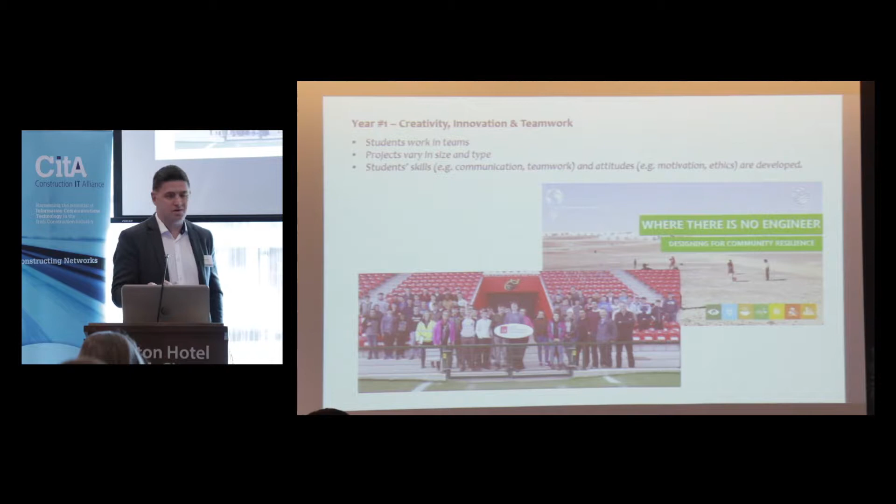This gets students to think of solutions to problems in third world countries. It's really good in that it gets them to think about ethics, it gets them to work in teams, it gets them to think about problems that they don't know. They're kind of going, 'we've just come to college, how do we know the answers?' And you'd be surprised at the solutions they come up with. But most important is that we want them to get used to working with each other.

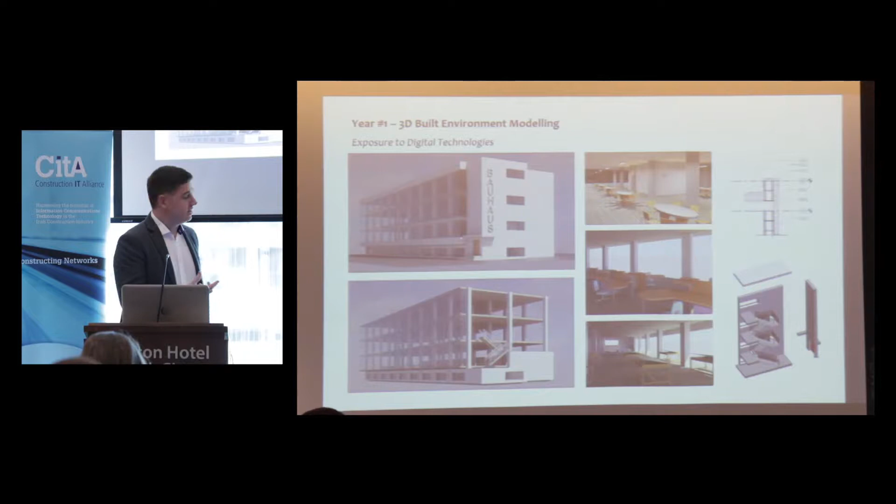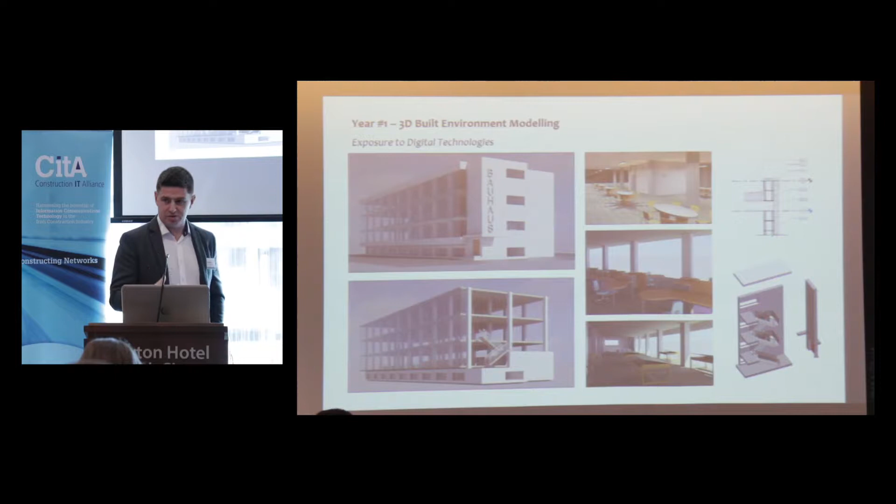Into some in first year, some in second year, we will look at the technology. You can say, look, BIM is about the information. It is, but if you truly want to get the most out of it, you need to be somewhat proficient in the technology, or at least understand what the technology can do for you. So we blatantly just do 3D modeling, okay, with no mad ideas other than it will feed in when they take it on later. What we do notice is that they can visualize what they're trying to do in the construction industry much better.

Another example is using an Autodesk project, InfraWorks, where we get them to work as part of a planning module, and they get to see an alternative to the Lee Tunnel. This represents where the tunnel runs in Cork, and if they put in a bridge instead, by seeing these things, they become more tangible for the students to understand. As an educator I have to keep in mind, I spent 12 years in practice on sites, dealing with problems and doing designs. These students are just getting used to all this terminology, and trying to visualize it on top of that makes it difficult. These pretty pictures, as they might be termed, are really good from an educational viewpoint.

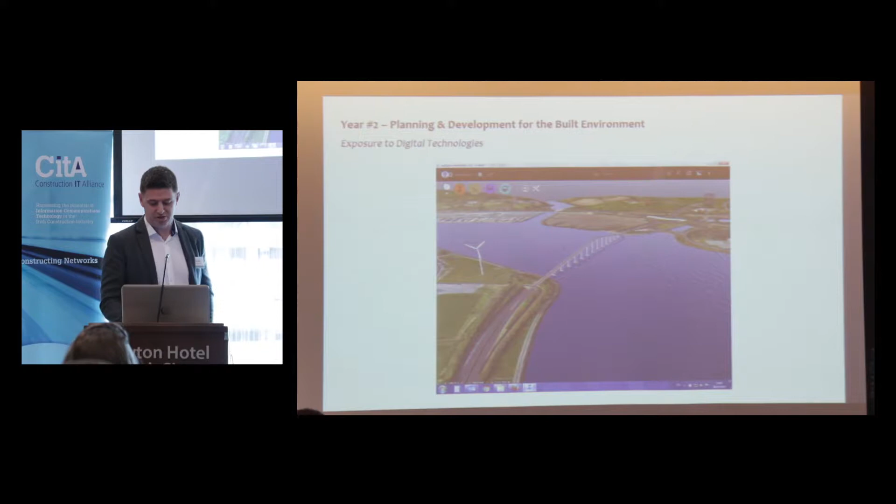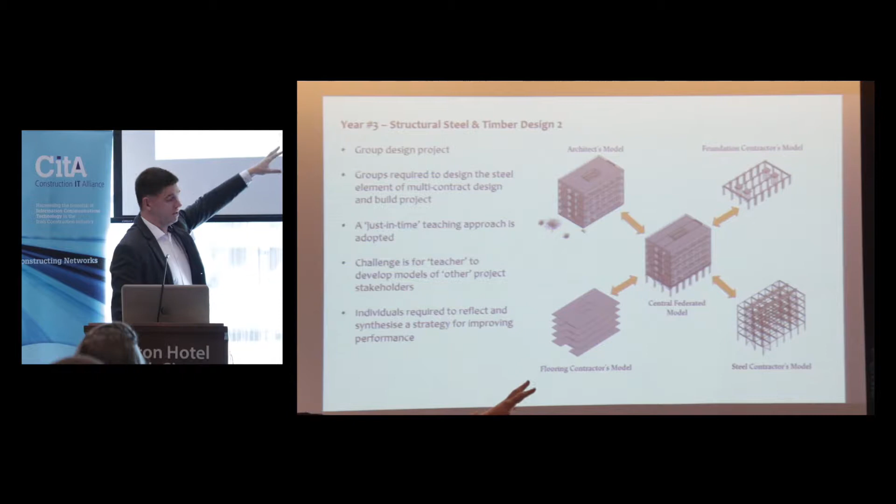So then we move on, as I said, in second year again we do some more technology. In third year we start to build up the three pillars - the process, the people and the technology. A module under my own control has students charged with working for a steel contractor to design a steel frame for a particular building, with particular inherent difficulties built in. They have to work in collaboration with a separate floor contractor, an architect, a foundation engineer - it's like a main contractor doing a design-and-build who has handed out the design package to three different teams, and they have to work within that.

So they're starting to take these other models into account in what they're doing, which affects how they design - not just designing on a greenfield site with no constraints. They do this in groups, setting themselves up as a company subcontracted into this main contractor who wants to develop this building. An interesting thing we do at the end is they write a reflection on the process.

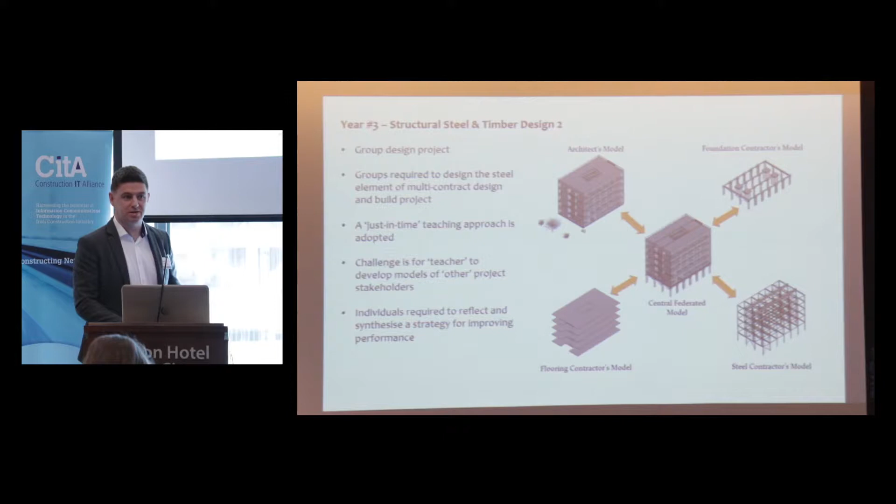So they're almost like company leaders. They're going, okay, we got through this process. If we were to do this again, how will we get better? They think of it in terms of people, process, and technology. They look at all of them and say what worked for us, what didn't. That helps from an educational viewpoint, that they can learn from their mistakes. If everybody gets everything right, I think people don't tend to learn a lot. But when you start making mistakes, as they inevitably will when challenged like this, it happens.

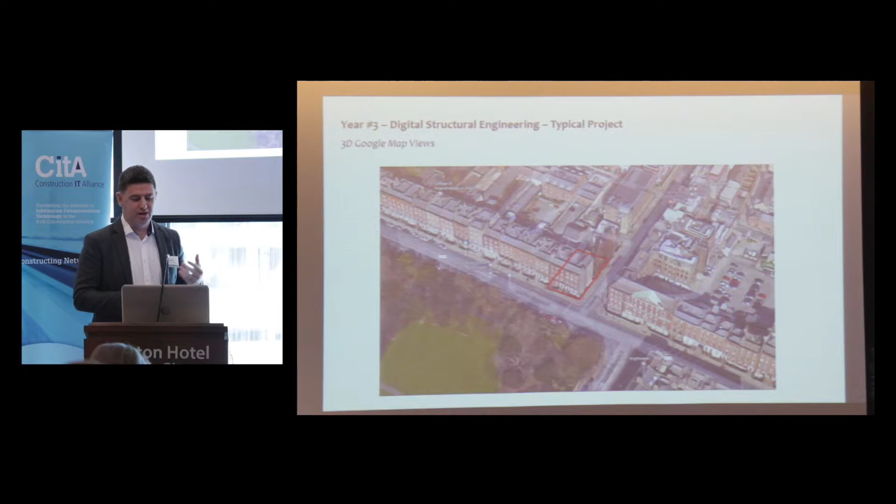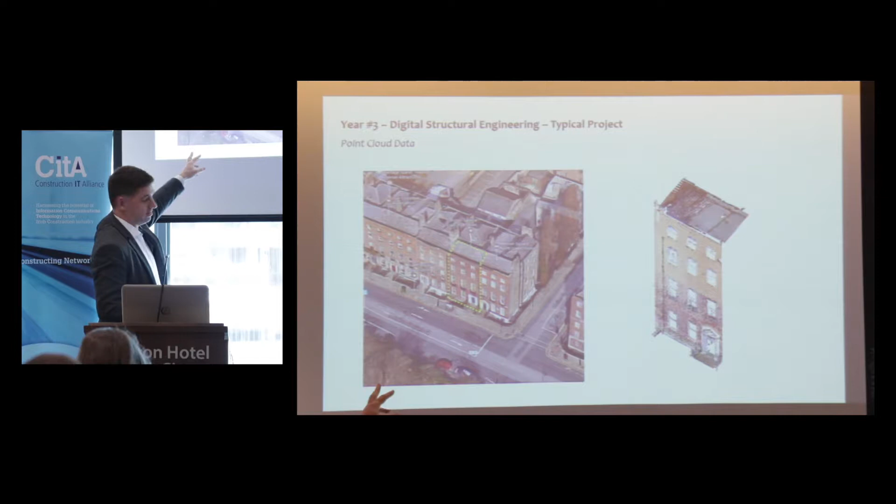Another example is in third year, an elective module I've tried to work into the course, since there's so much in the individual courses already: digital structural engineering. Fundamental to this, let's say we take two Georgian terrace houses, and we're retaining the facade of one. So we have a laser scan of that. By the way, that laser scan isn't of that particular building, in case you think it is - they're different. They just look alike enough to create that sense of reality for the students.

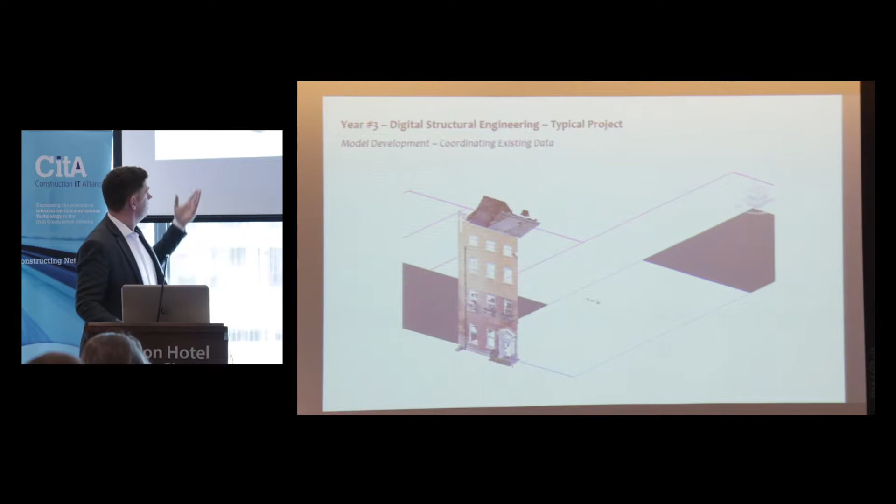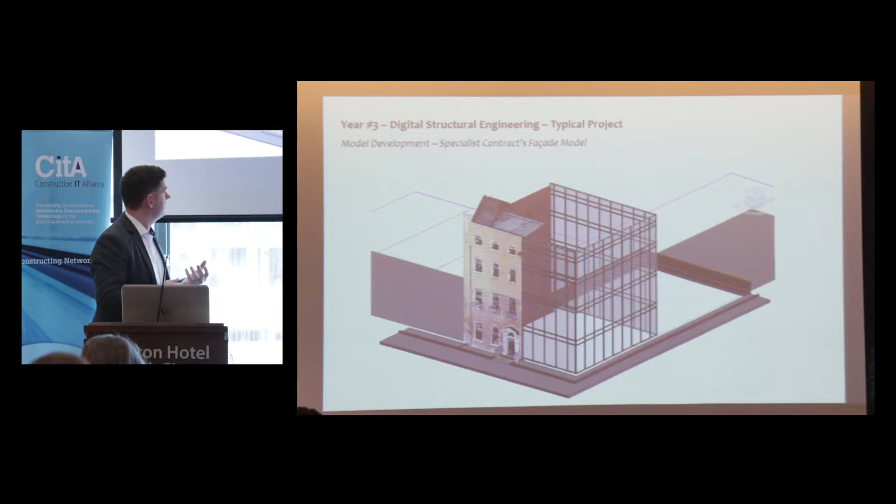The students take the point cloud data, build an as-is model of it, then receive a third-party facade model for the curtain walling, and within that context they have to build up the proposed new structure. When we strip everything away, we ask, where's the foundation? For structural engineers, that's kind of important. So it helps me go, okay, is anything missing from that picture? And if they don't get it, I can explain it somewhat.

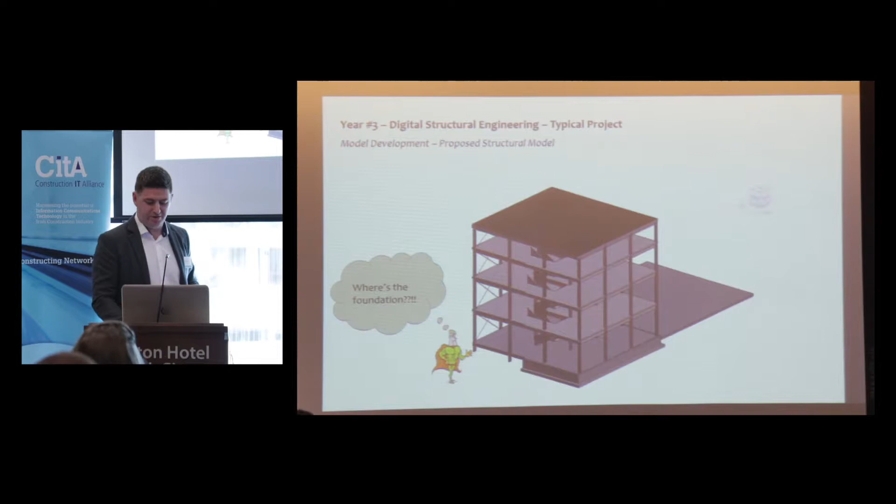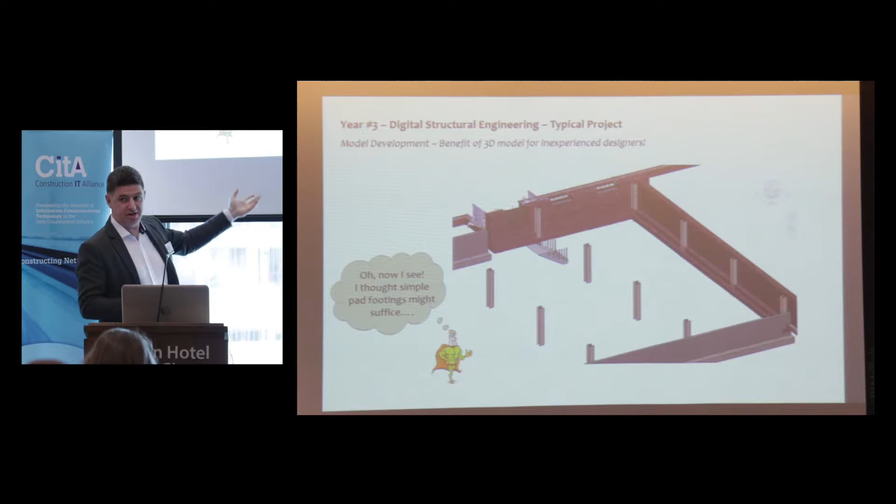The other thing it brings up is that pad footings would be the norm. If you look at that picture, perfect, a couple of pad footings there, great job. Yet if you look again in the context of the existing structure, you can see that the stepped-out foundations of the old Georgian house create a particular problem for where your column comes down. If you're a structural engineer with 5-10 years experience, you deal with this sort of thing day in, day out. But if you're a student who's never come across it, you can't tell me that visual doesn't help them understand the problems they face as engineers designing stuff. And the same would go across all the disciplines.

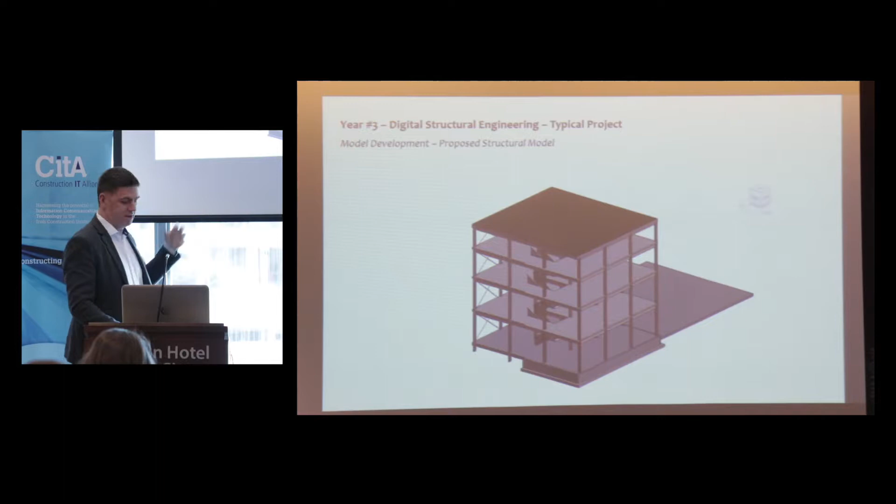Then we move into using that visualization, and look at using that central information model for other purposes. We can take that across into Tekla and do some structural analysis as we see fit. On that, I'd say - and this is the beauty of it - there's a lot of work to do on interoperability, on how pieces of software communicate with each other. The funny thing is when the students did this and it went across almost immediately, they went 'oh, this is great - what were you doing with us all this time, Ted, with that boring stuff? This is just spit it out.'

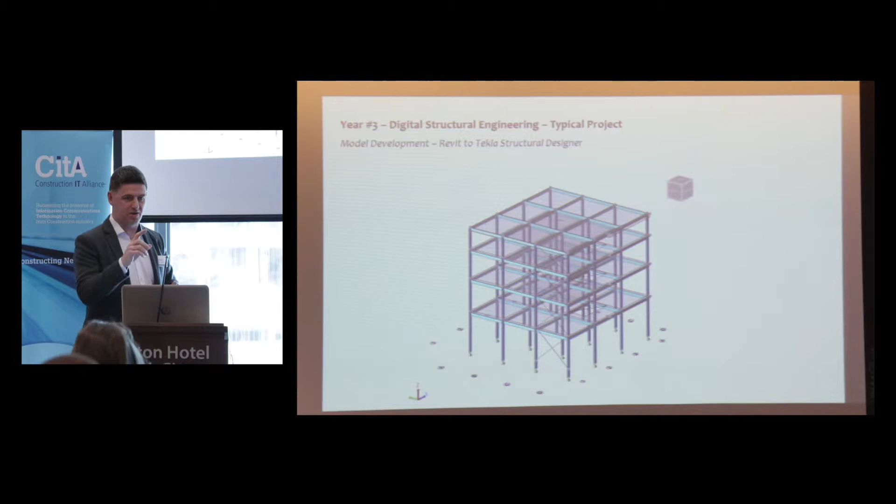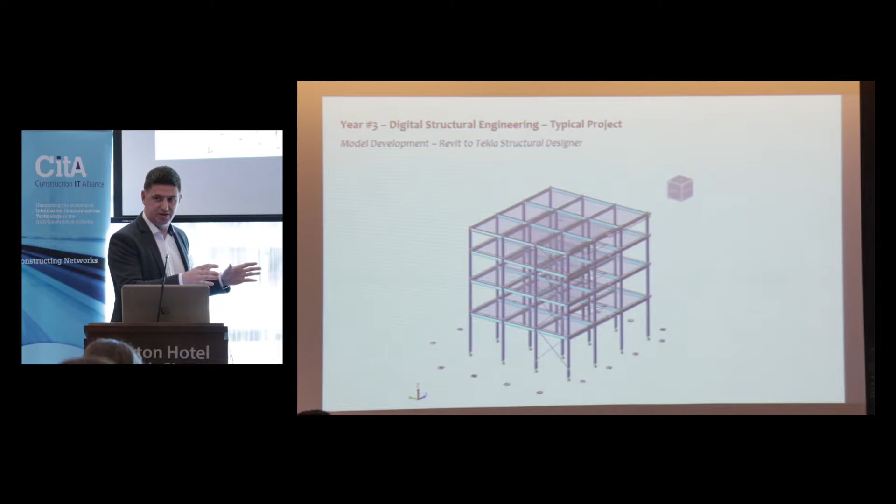And then we started hitting the analysis and errors - that any engineer, architect, or QS who's ever tried to extract information knows: it's great when you see it in the brochure, but when you're trying to do it in reality, there are lots of issues. So you spend a lot of time gaining experience finding out what the errors are, and that all takes time. That's fine if you're a consultant with someone in charge who allows you to learn, because you get proficiencies and efficiencies from that in the long term. But I'm in a classroom with 18 students getting 18 different errors - it's not exactly inclining me to push the benefits of BIM.

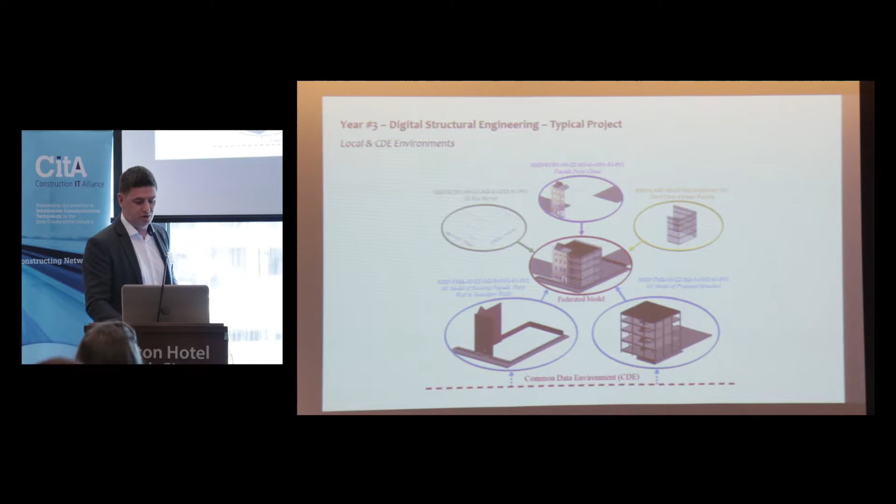This is the context, the bigger picture of what they work on - this is the common data environment. In it, I would have made available to them the map, the point cloud, and the architect's model. So they would sit there, and you can see roughly, if you have really good eyesight, that we're using the naming convention from PAS 1192. These are the two models that they've pushed up, which allows me as a lecturer to go in and look at how the thing ties together, what they've designed. Down at a local level, they have their own company server and their own models.

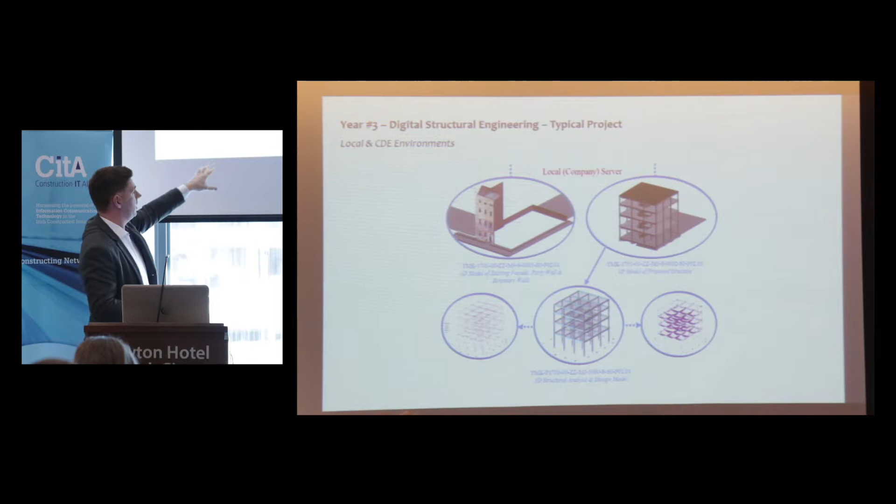Again, we're using a company naming structure that's somewhat compliant with PAS 1192, but does reflect what people are telling me in terms of reality. And you can take that model down and create submodels, so again they're getting this picture of how the BIM thing works. The beauty is my module is called Steel and Timber Design, so they're still very much designing steel and timber as part of the process.

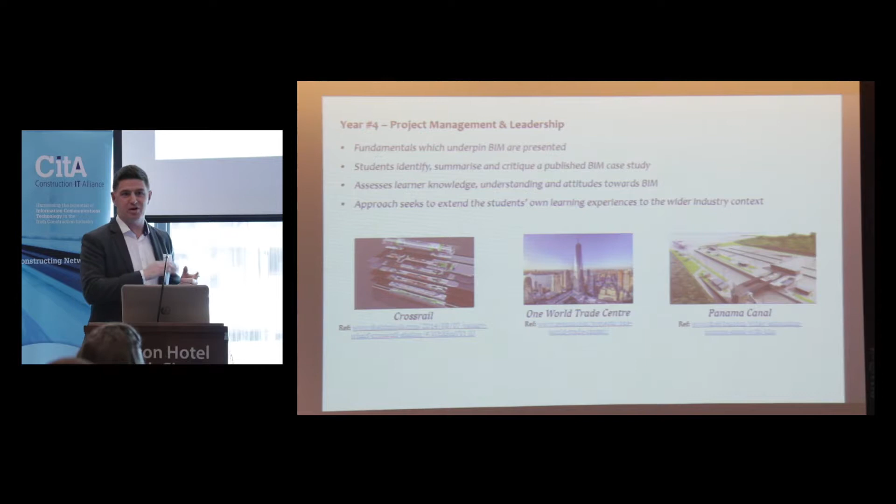Then we go on to fourth year, and this is old-fashioned - I lecture, they try and listen, some fall asleep, some stay awake. But a couple of hours I give them - the great thing now, when I started doing this, they'd never heard of BIM before, whereas now they've done those modules, so they have an idea of what I'm on about.

So I show them all the other stuff, and I say, right now let's have a proper sit down and list the standards and why they exist. Then I get them to go off and do a case study. The great thing for me here is I keep putting up the list of case studies we do every year, so they can't use any of the previous ones. I'm building up a whole repertoire of interesting case studies.

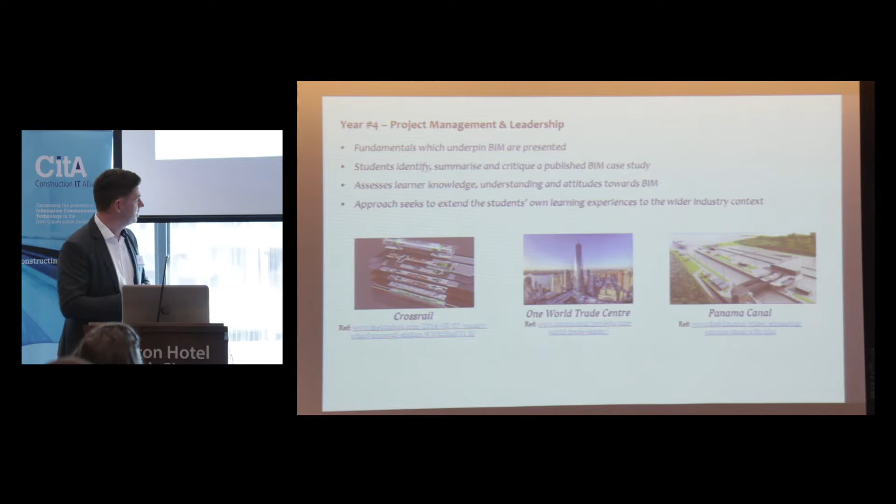The thing I've started to do with them now is get them to reflect back. Okay, you've got the case study - what do you think of it? You've done BIM. So I have the naysayers who think it's a load of rubbish, and then I have the guys who are really into it, who think it's the best thing since sliced bread, and the truth is probably somewhere in between.

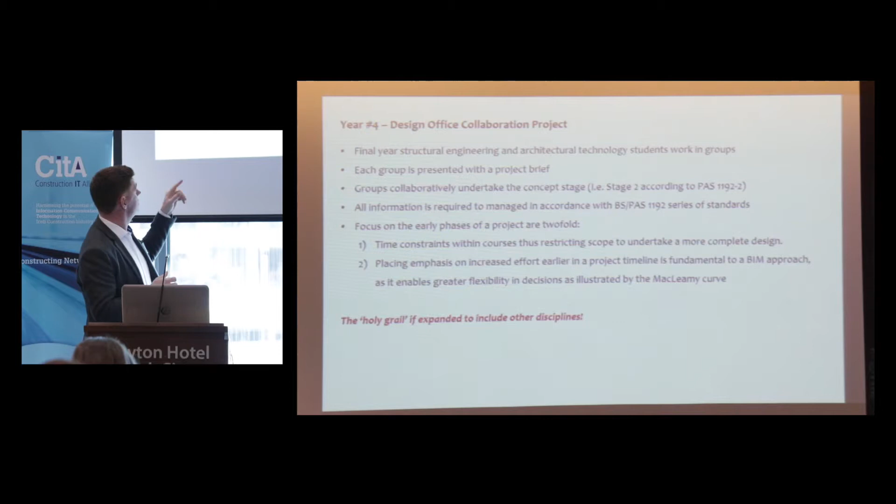But they go along and can tie the work inside in college to the greater scheme of things outside. And finally, probably the holy grail of what we're trying to do is the start towards interdisciplinary work. So in fourth year, I have a project that I run with structural engineering and architectural technology students, and I get about 15 to 20% of a module, because that's all anybody will give me to get architects and engineers to talk to each other. I'm sure Alan will say the same - this is not an unusual thing, I know in other institutions it's the same.

But what we do is we give them a little brief project. They have to explore the project for the early stages. And again, putting it in the early stages is because I only have a finite amount of time to work with them - we look at time constraints, that's restricted. But point two, we place emphasis on early effort, which links back to the MacLeamy curve of putting in that work earlier.

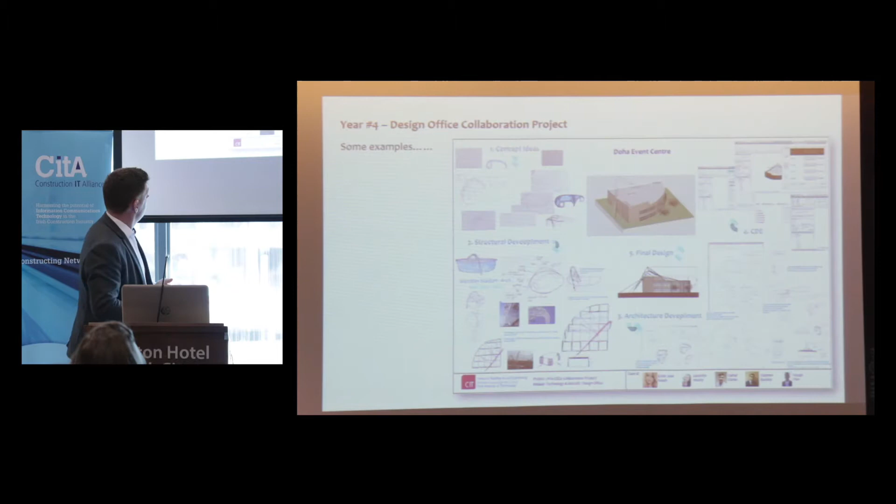So what do they produce? They produce a poster at the end which gets them thinking of all the different things. They have some hand sketches, which I think is absolutely fundamental, and they're tying those hand sketches into the BIM models. They're sharing this information in a common data environment. So we have architecture students in the architecture facility, and engineering students over in the engineering part of the building, and they can digitally collaborate on the project.

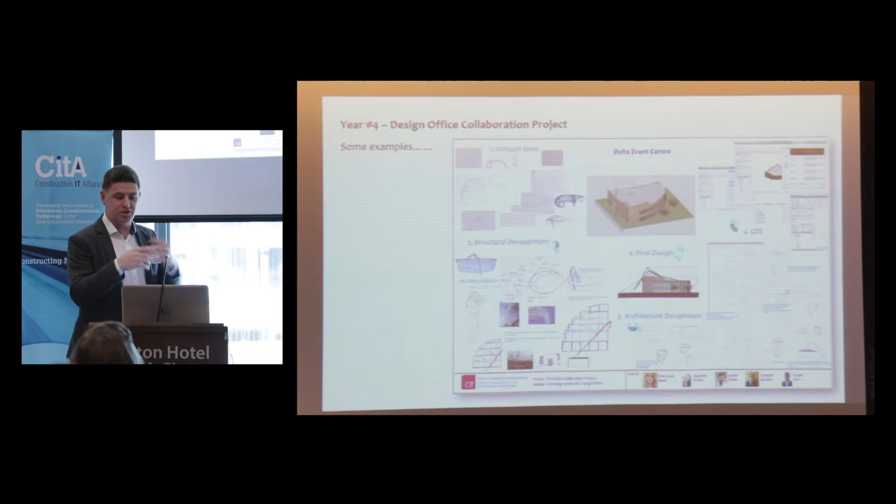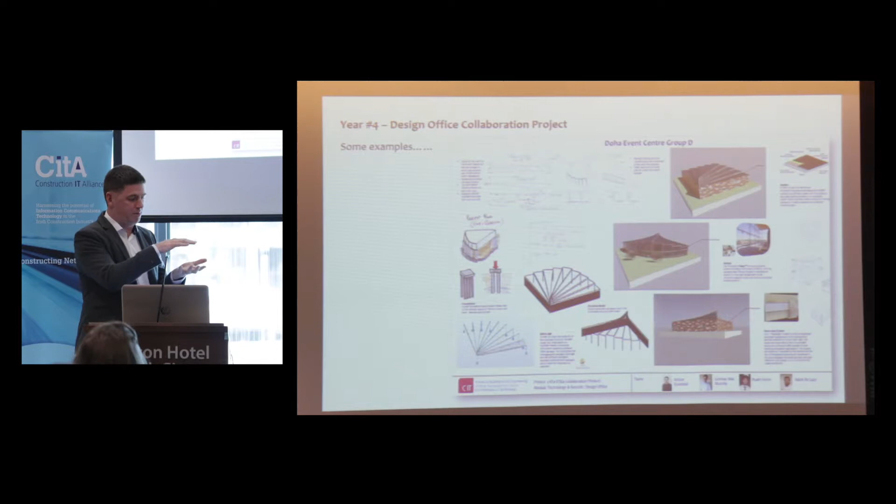So that's one example. Second example - I set them in the same building. This was an event center in Doha, and I gave them a raw BIM model of the shape, and they had to come along and actually develop that through the conceptual design stage. Pretty good - it gets them working together again, and works all the important aspects of it.

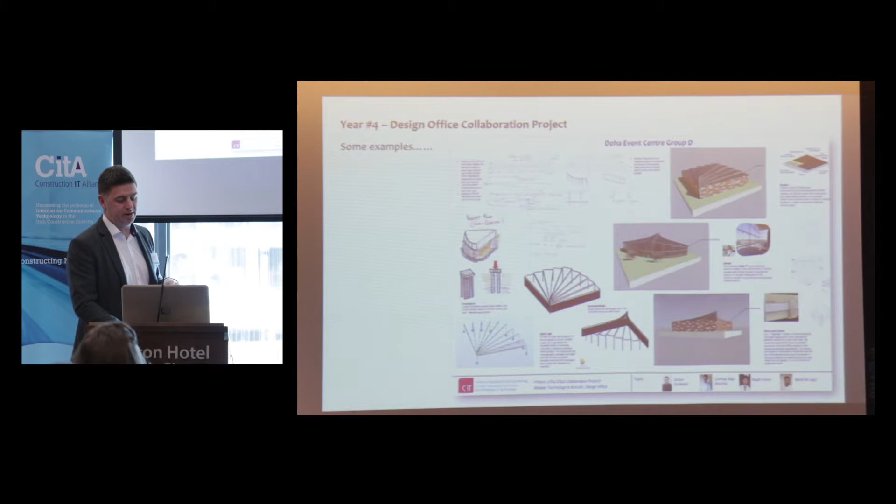So that's undergraduate - that's what we're trying to do. Hopefully it's making a difference, and hopefully we've not compromised any of the things that Engineers Ireland want in terms of output. So if we look at the research then - an interesting research project that kind of half accidentally happened a couple of years ago and has continued to roll.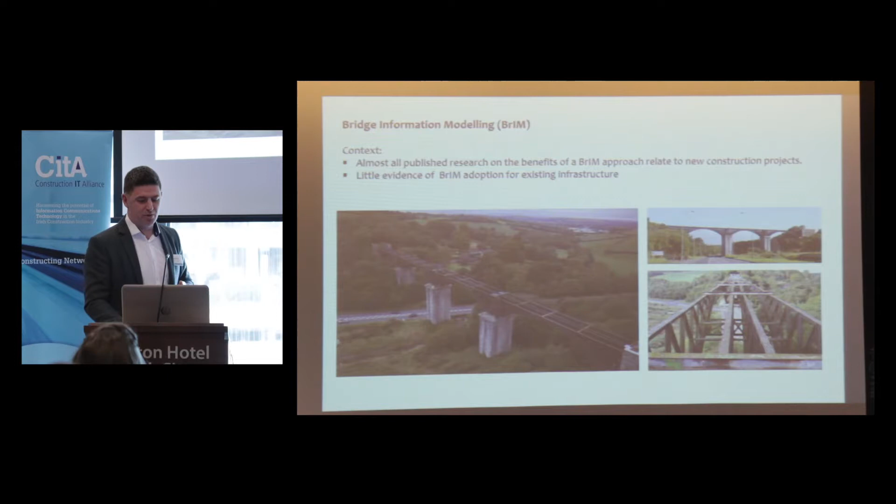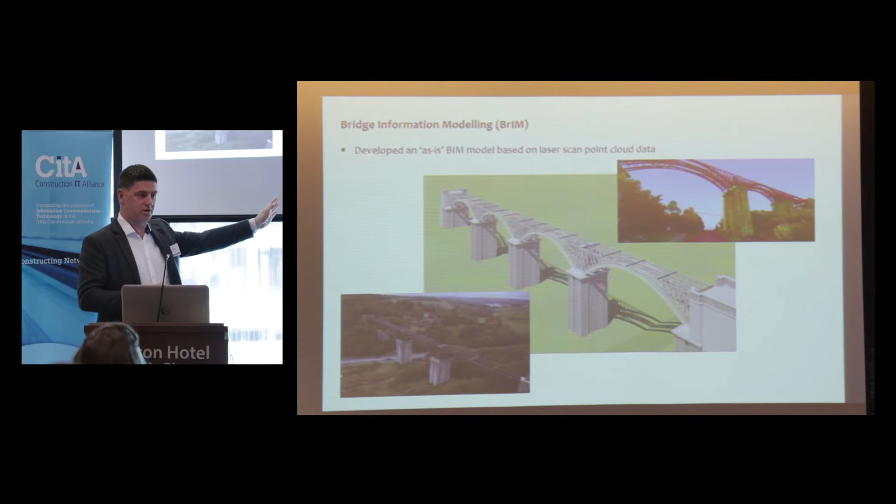Any of you from Cork will know the Chetwynd Viaduct. What we did with that is we had a laser scan done by Murphy Surveys - we didn't have it done actually, sorry, it was the client, as part of looking at the potential of a cycleway route from Cork to Kinsale.

So they did a laser scan survey, and I saw this at a different conference. It goes, hang on, you have a laser scan point data cloud - it could be a BIM story. So what we did is we worked quite hard and we developed a Revit model of the thing.

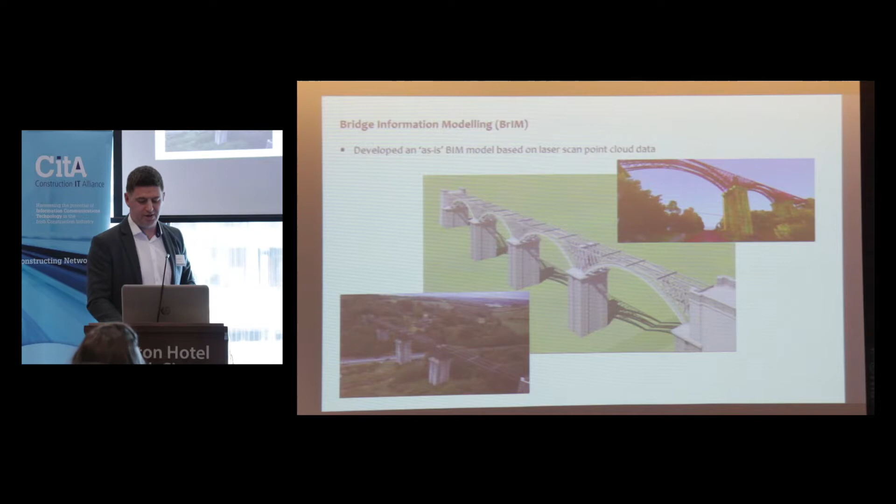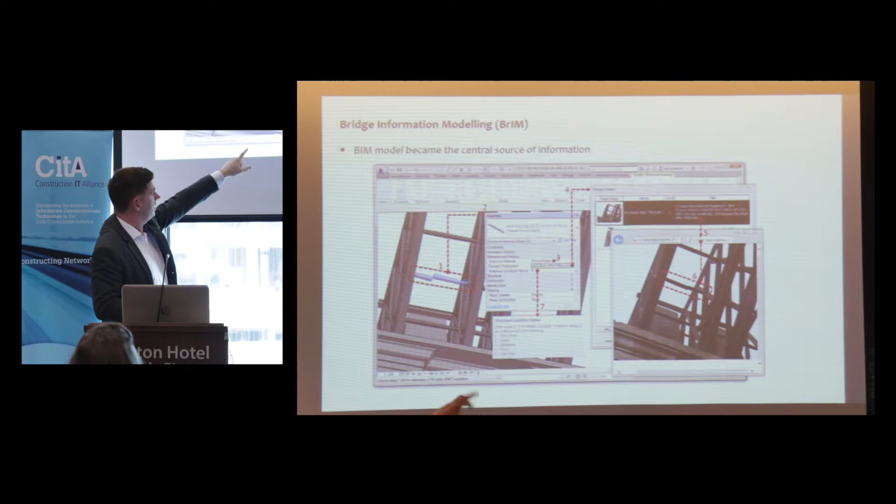We proved that through that we ended up with a lot of benefits. A little snapshot of the benefits is here, looking inside Revit. Here is the 3D model, and here's a particular fractured element of a tie rod. At point 1 you have the tie rod. I can select that, the properties will pop. Within the properties box, number 3 will tell me the type of material, and at number 4, there's a photograph linked in, so you can see the photograph of the real Chetwynd Viaduct and the model.

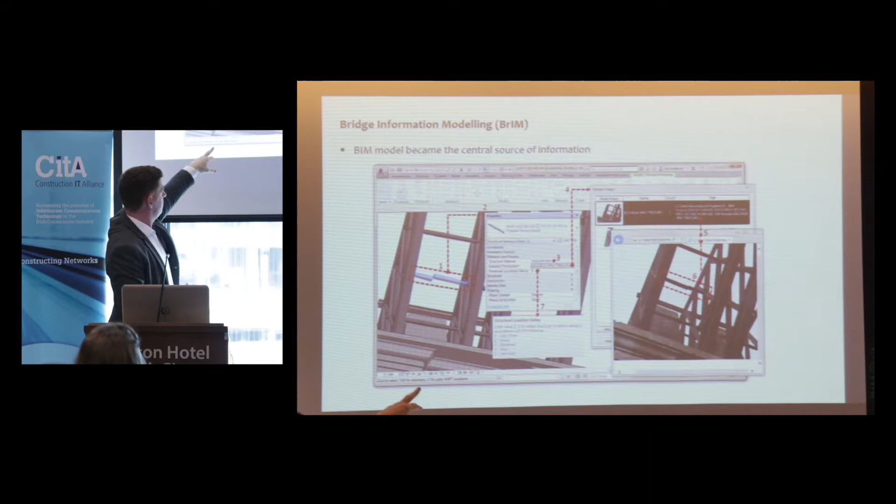As a senior engineer, you don't need to go out yourself, you might have someone more junior go out on site and do all this, then come back and say, here are the key points. That engineer can now get a sense of what's really the problem out there and where it exists in terms of the entire project. Finally, you can register what type of condition it's in. From an asset management perspective, this would be typical in bridge maintenance contracts, where you'd be scoring it. You can create automatic schedules from that, so you can see how many issues or serious issues are contained within a particular bridge structure.

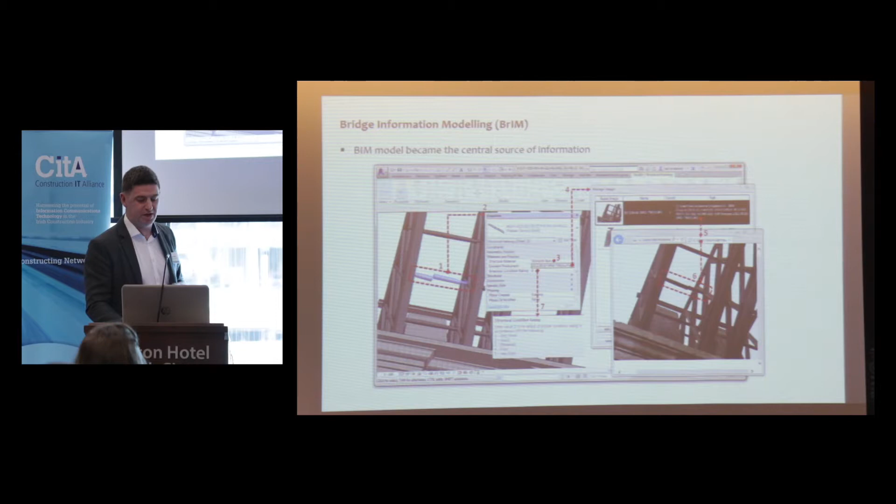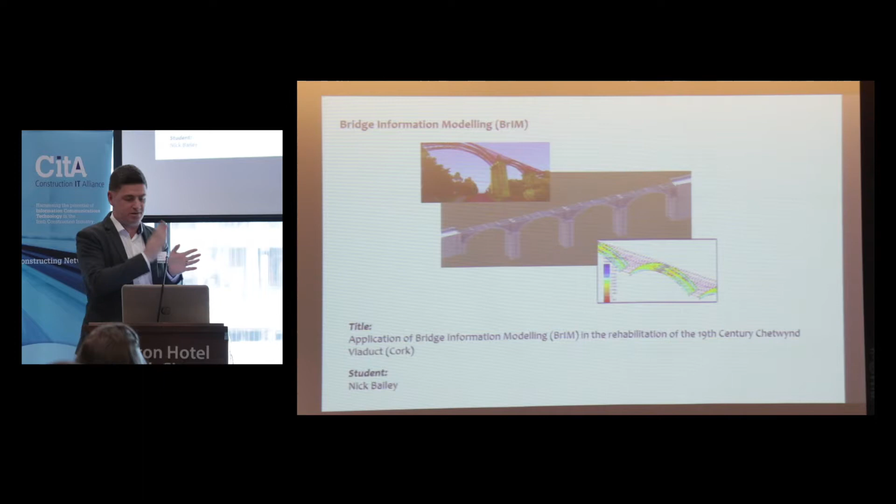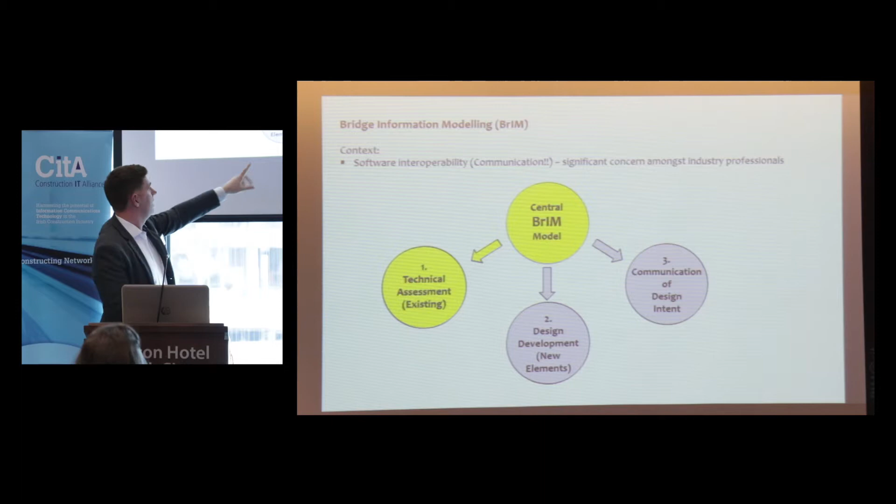So that was the first element. We moved that on, and a student in the last year and a half took it on as part of a research project, final year in our structural engineering degree, to see if there were further benefits. So I'd taken it up to an as-is model, and I thought, yes, there are benefits, let's see what happens after that. He looked at three different strands: the technical aspects of assessing the existing structure, design development with the new elements for the proposed cycleway, and finally how it operated in terms of communication.

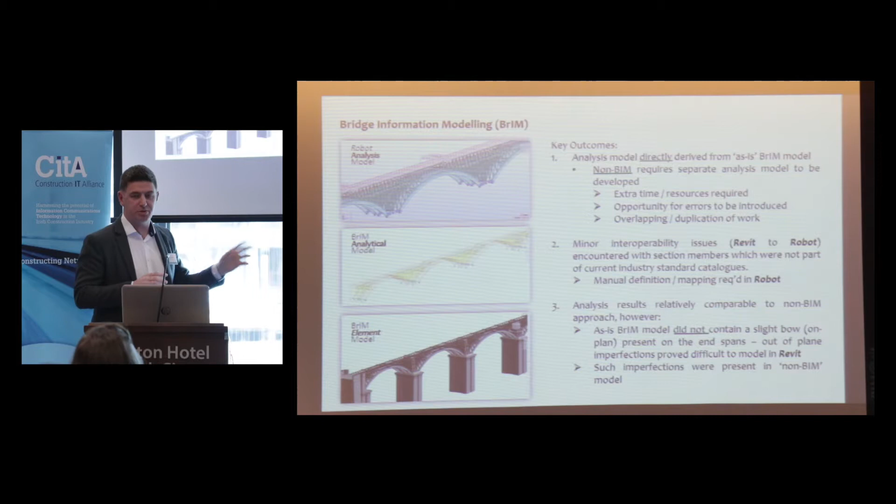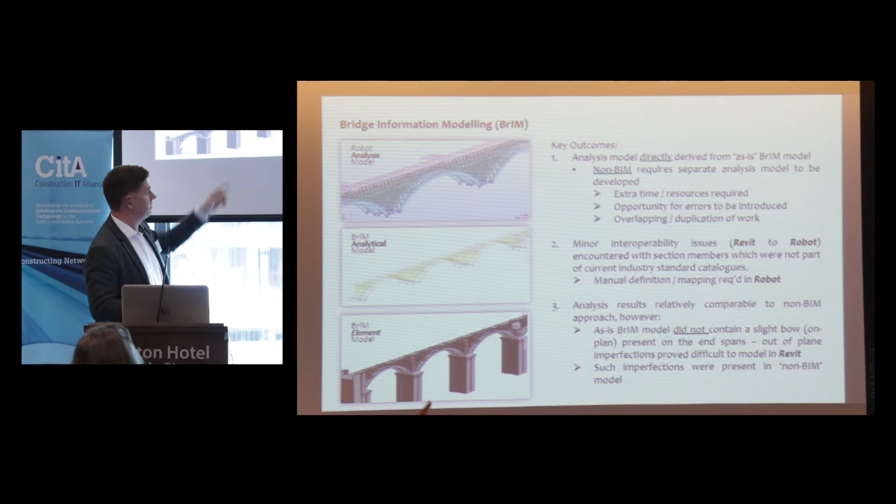Taking the first one, in terms of the model, he was able to take the Revit model I had developed, bring out the analytical model that sits behind it, into structural analysis software quite quickly and run the analysis. Now, that wasn't perfect, but here are some outcomes. In the non-BIM approach, you need separate analysis models versus your element model, which takes time. That was negated by the fact that I built one model now suited for two purposes. There were interoperability issues with material properties not being right, so they had to do a bit of work in the analysis software to feed it back into the model properly. Finally, the analysis results were comparable with the original assessment done via the traditional approach.

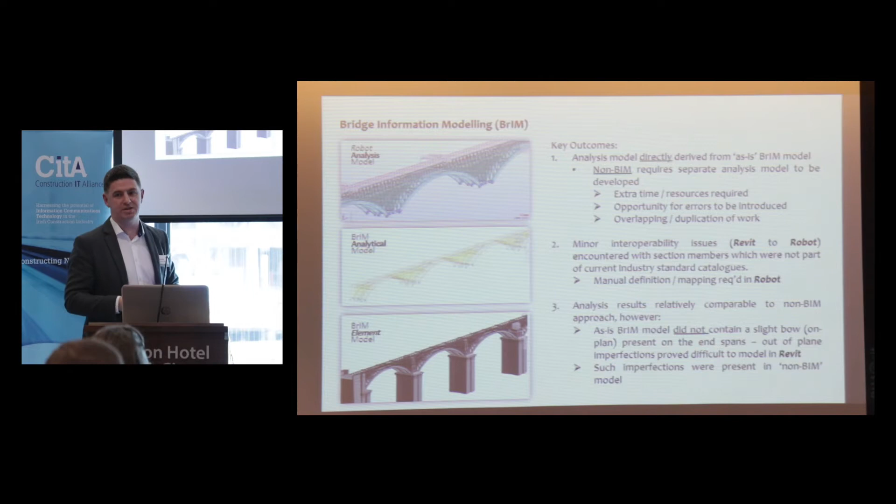The thing to point out, I found it really difficult. In the long run of the bridge, there's a slight bow in the spandrel wall, and if anything's bowing, it's more likely to buckle. Unfortunately, Revit - and if there's somebody in this room who can help me with this - I was able to adjust it in two directions, but that third direction, Revit really doesn't like being slightly out of plane. So again, I'm pointing out the beauties of technology, but hopefully giving you a dose of the realities that exist as well. There are limitations we need to get through.

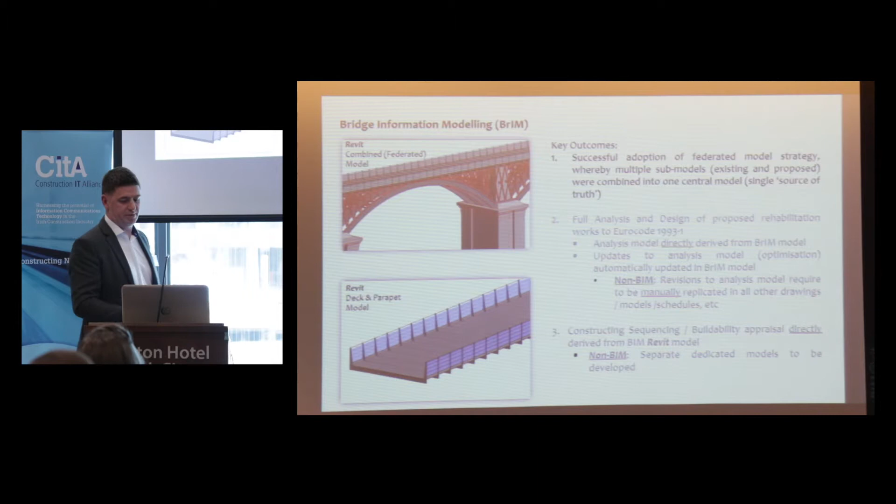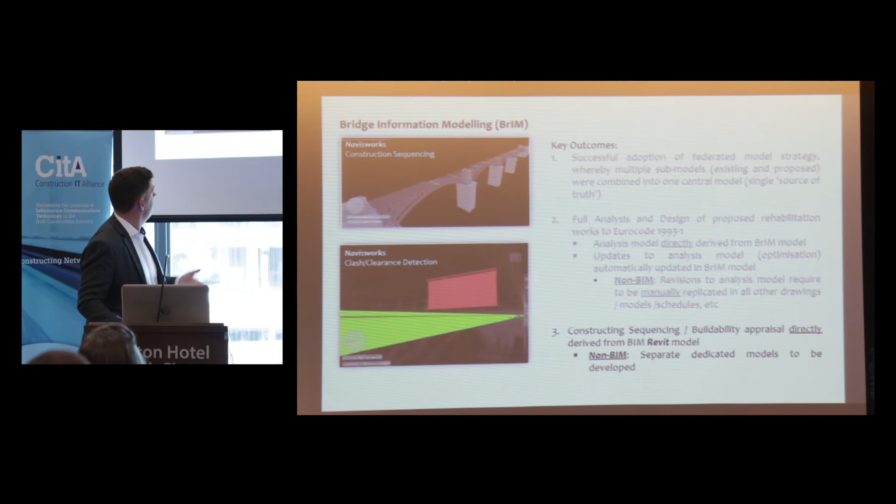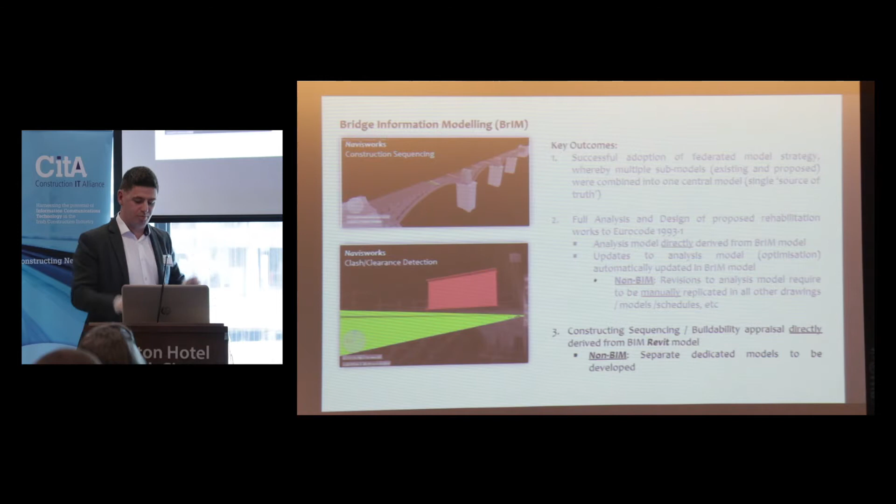The second part is design development. He was able to look at the new proposed elements and use interoperability to solve that very quickly, and do analysis again to the current codes, which is brilliant. Finally, we could look at construction sequencing of the bridge, and clash or gap analysis between the existing structure and the new structure. All of those would have to be independently created, whereas all this was like a byproduct of that original as-is model, which, by the way, took longer to create than the drawing and solid model created at the time - but now we're looking at the long-term benefits of those.

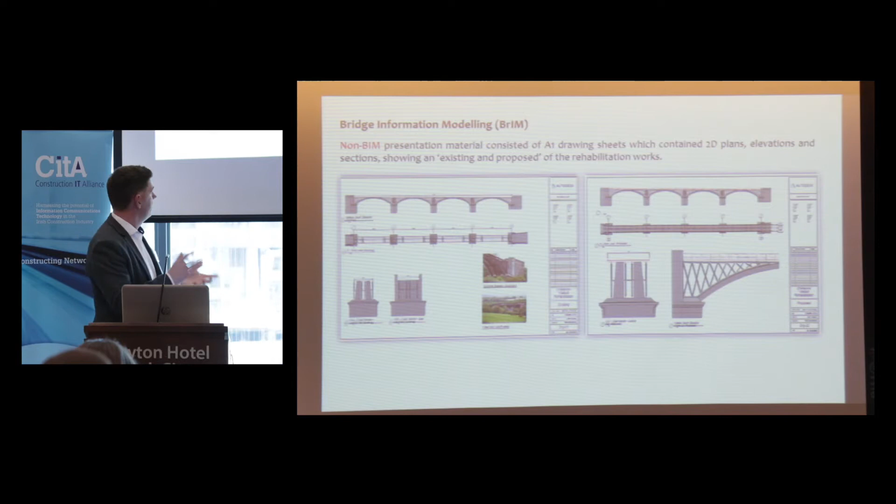Finally, communication of design and thinking - I think this is really important, I've alluded to it on many occasions. I know Alan said collaboration; I think this idea of communication is almost fundamental. Either it's you talking to the next person, or it's one computer program talking to another computer program. That communication is vital. That's typical of what you put up in a public consultation.

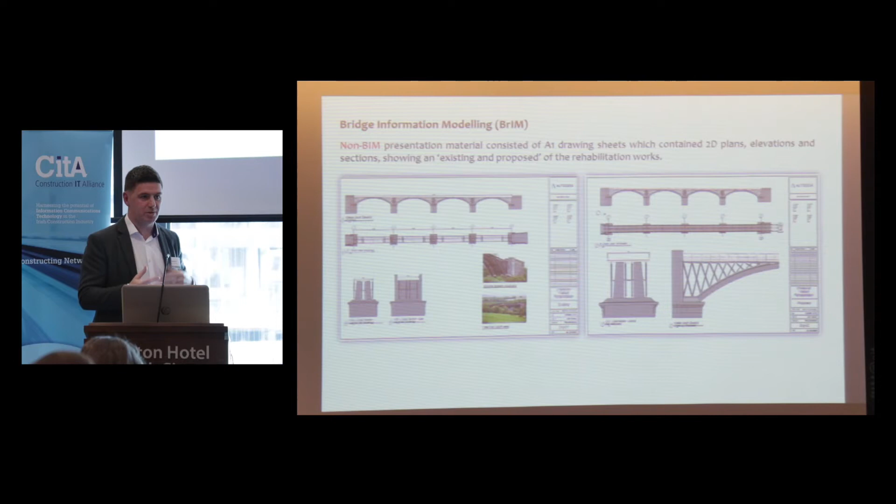Look, this is what we're going to do, everybody. This is how it's going to look. People who are typically non-AEC sectors will be going around trying to interpret 2D drawings, and that might not be their thing. Whereas with the 3D, we are able to spit these out.

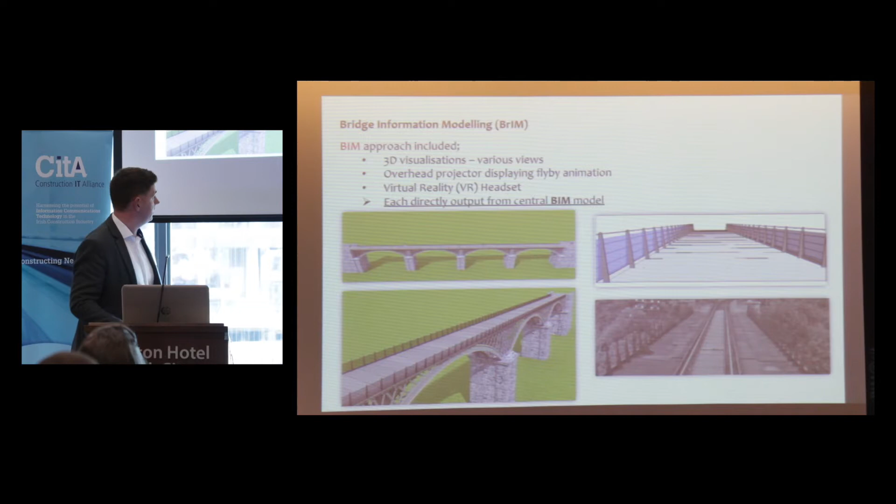There's an old photograph of the deck when it existed, and we were trying to replicate the flat iron bar coming up, and rather than having the wire running along, we were putting in glass from a safety viewpoint. But we were trying to replicate it, and it gave us the opportunity to tease that out. Again, much easier than it would have been had we used the traditional approach.

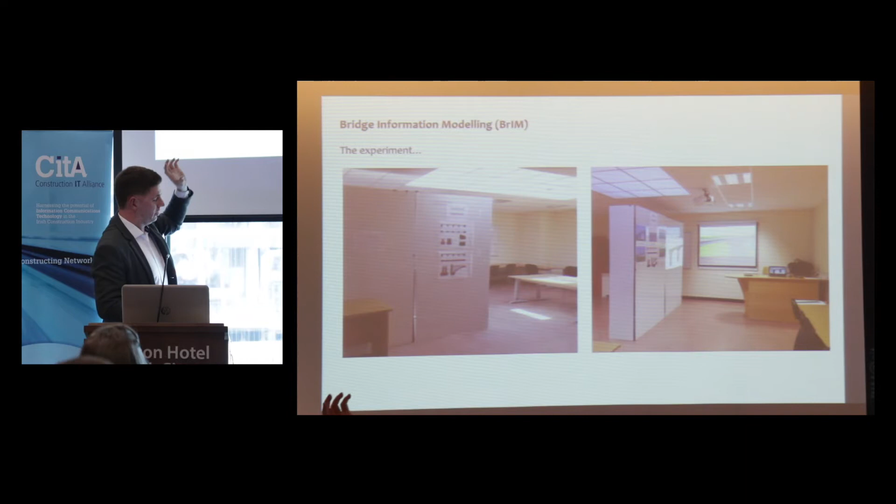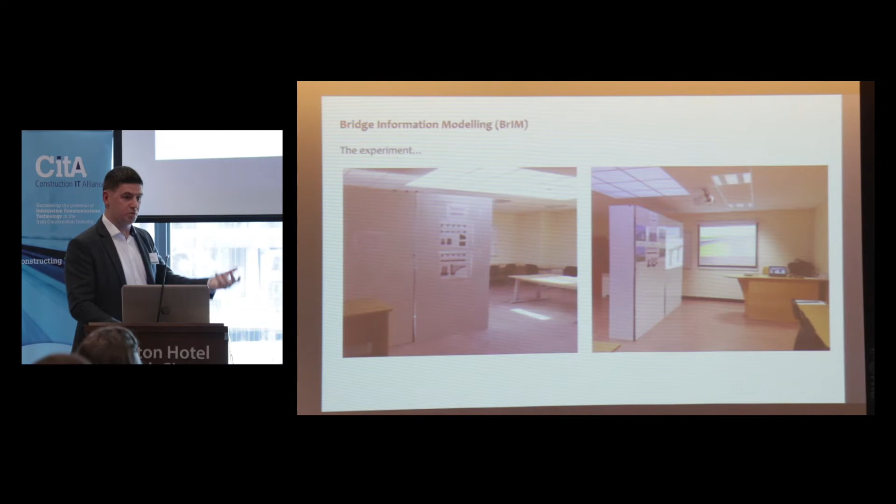So we set up a little experiment to see how the traditional approach, with two kind of 2D drawings and a couple of photographs or photo montages, compares with having video of a fly-through, or VR where you could pop the headset on and have a look around. We got over a hundred people in CIT, some from AEC, some from non-AEC disciplines, to come in and say what they thought of it all. By far and away, the visuals created via the BIM approach were much more significant in communicating the intention.

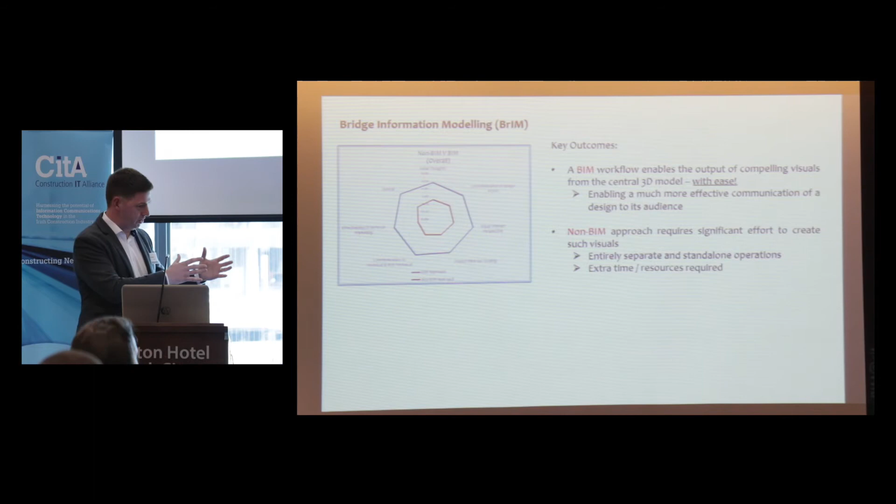And that's vital. We only have to look at flood defences in Cork to see how vital it is to communicate with non-technical people. It's highly controversial, and I know who gets shot for that particular approach: the engineers, which I think is completely wrong, because they were told, look, this is our budget, you've got to keep the city from being flooded for the minimum price. That's absolutely fine, but then you run into potential communication issues, and this can be a huge resource for us on that front.

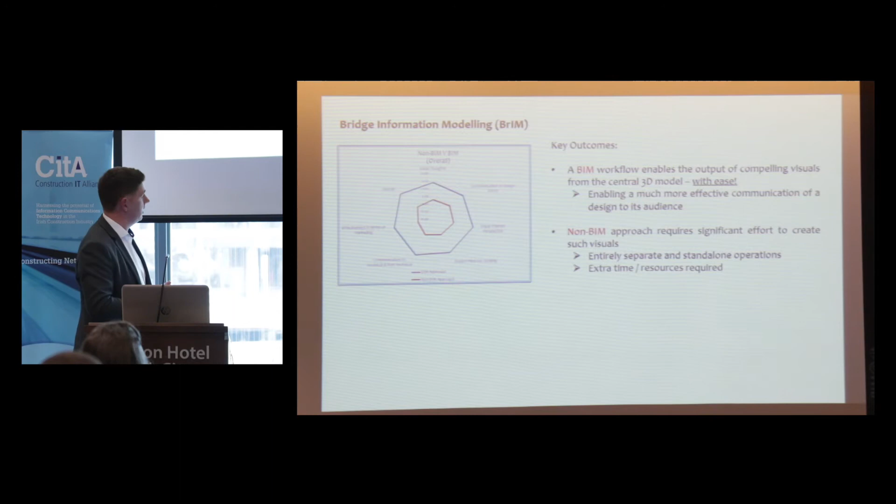So again, that worked, and it's probably no rocket science that if you show something more immersive, it can be a huge benefit.

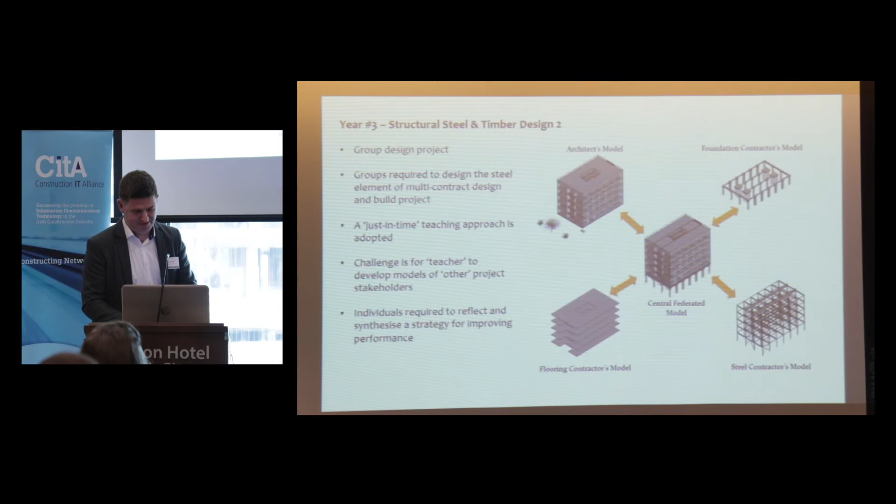Somehow I've gone back to the start. You don't want to hear all that again, no? I don't want to say it again. I'm already down for too long.

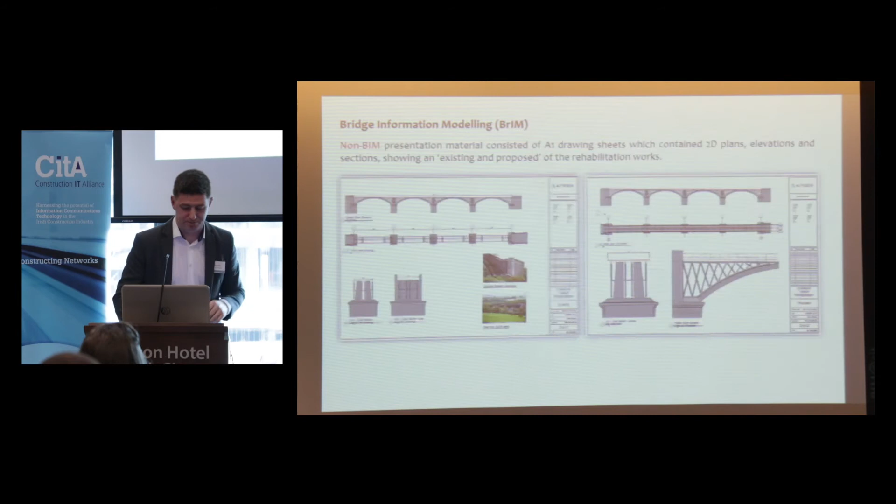So the last section, which is on the CPD, is very brief, just for those who weren't here. The last point to make on that, and this is important, is that just last Friday night, that particular project by Nick Bailey won the Institute of Structural Engineers Ireland Top Student Prize.

Now, why is that important? Because the Institute of Structural Engineers, just like Engineers Ireland, BIM is in the background, okay? It's certainly not forerunner, it certainly wouldn't be the type of project. I said to the student when he was taking this on, this won't win you any prizes because it's about pretty pictures.

The thing is, a neutral panel sat down with master's students from DIT, from Trinity, from UCD, and from UCC, and said this won it. This is important, not for my students or for us, but from the point of view of the recognition that now gives BIM, because we're moving past this idea that it's just the pretty pictures.

I think one of the judges at the presentation asked, who's going to pay for all this BIM, when Nick was speaking. That was somebody coming from zero understanding of what BIM is all about. Hopefully, and obviously Nick must have worked some bit of magic, because, as I say, it won the prize, which is important from the whole BIM perspective, that it's getting recognition at that sort of level.

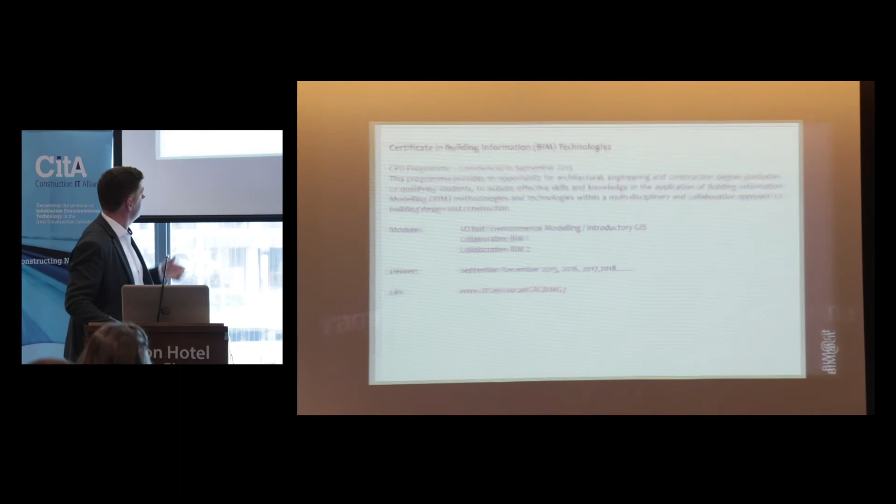In terms of the CPD programme, most in the room already know about it, some have sat through the pain of it. It's three modules, 15 credits, a special purpose award. I keep saying I'm going to come back and say there's going to be an add-on, a build-on. It will happen, it's just a matter of time, but very soon it will happen.

It's kind of unique, as are most of these programs across the country. It's not for engineers, it's not for architects, it's not for MEP, it's not for quantity surveyors, it's actually for everybody. It's for all of those and above, which can prove challenging to try and satisfy all of those, but we've tried to create that.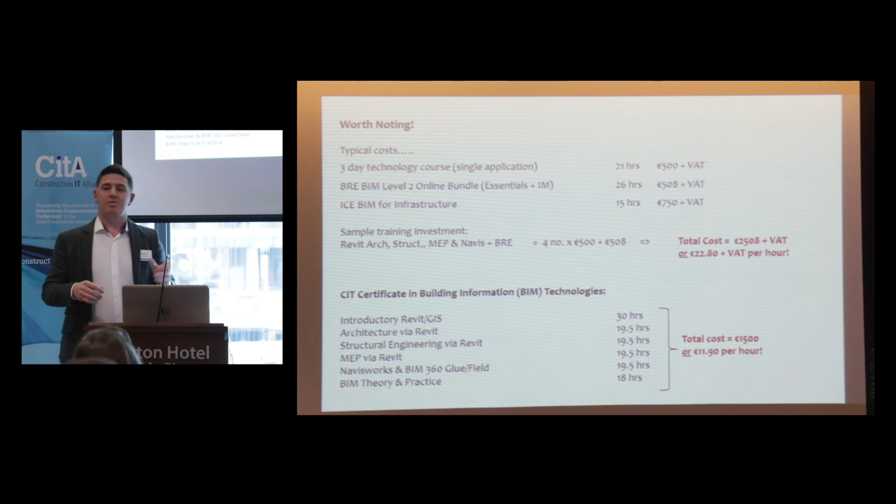I'm not putting that up because in fairness, we've had really every year on year really good attendance, good participation. It runs really well. I'm not putting it up there to say how great we are. My problem is coming back to an issue that exists, which is that I can't say to people, yeah, you're BRE certified or you're the equivalent to that, and that's what's making the headlines right now.

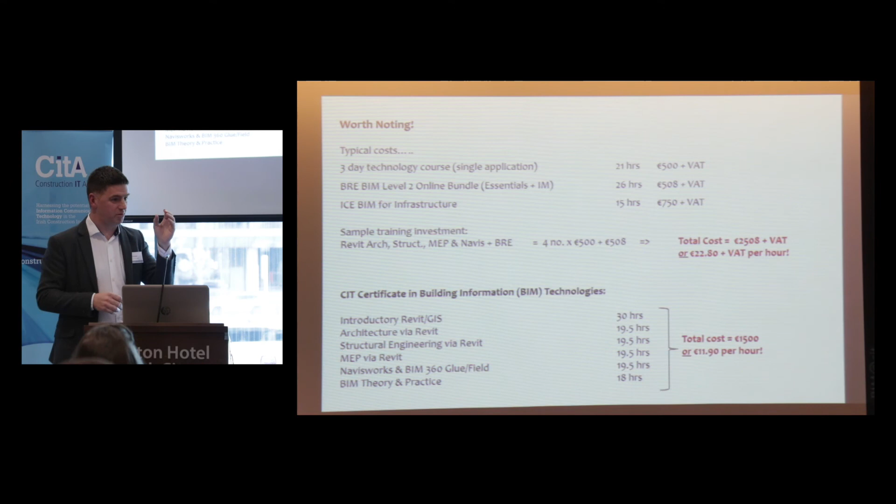So to hear you, Alan, going on about NSAI coming in and becoming that, and then working with us so that our courses, across all the institutes, tick the box, because it kind of jars with me that people are coming over from the UK here and accrediting us for a UK qualification, and the money's just, this is like, we should be supporting our own.

This is the one thing I think I stood here in this very forum about 3 or 4 years ago. I said the one thing I was delighted about BIM is that we could export without exporting our people. I've seen friends in the last 10 years who left, and now I see people working on jobs in the Middle East and further afield and in Scotland or whatever, and this is great because they're still here.

And this is the thing I liked. What I don't like now is this, like we're almost looking outside to, will you approve us? I think we need to get that inside approval so that I can say to someone, yes, you know what, you are going to get approval. It is recognised, other than, I think, the value for money that you get from it.

So in conclusion, we've progressed the undergraduate as best we can. It makes no difference to you guys, you're all out and doing fantastic things already. But hopefully it tells you the story of what we're trying to change.

And what I always do is I meet people at these things, tell me what you think should happen, okay? And people with no experience to loads of experience come back and go, and it's these little tablets of information that I use when I'm redesigning stuff that I do at undergrad level, and indeed the same in terms of the CPD program.